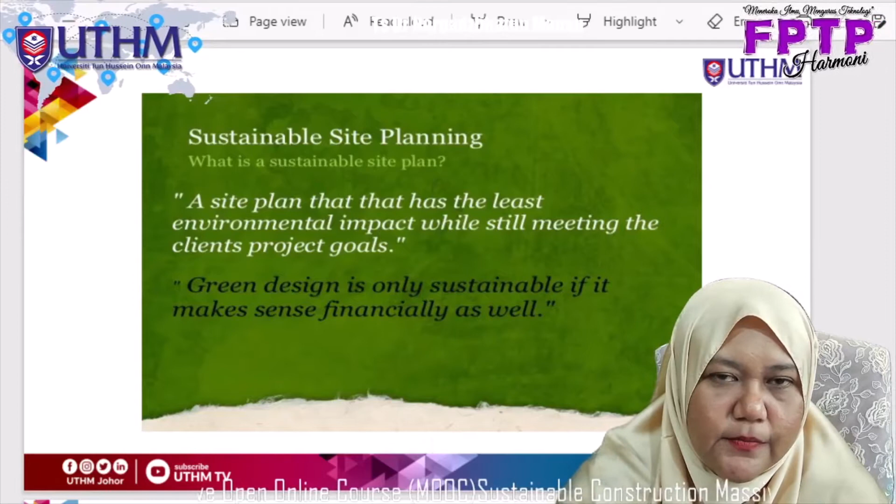What is the definition of site planning that is sustainable? A site plan that has the least environmental impact while still meeting the client's project goals. That is the definition of sustainable site planning.

So to become sustainable, you need to worry about three main things. In order to be sustainable, you need to consider these three aspects, which are social, economic, and environmental. When you achieve balance between these three main elements, you can and you will achieve sustainability.

So in regards to our topic today, which is site planning, why do we need to have a sustainable site planning? And what does it require to become sustainable during site planning?

The criteria for selecting a new site normally include engineering, environmental, and economic aspects. Usually, some of these criteria limit the choice of potential sites to a given field. These sites are then investigated further for their suitability through site visits and analysis of existing information.

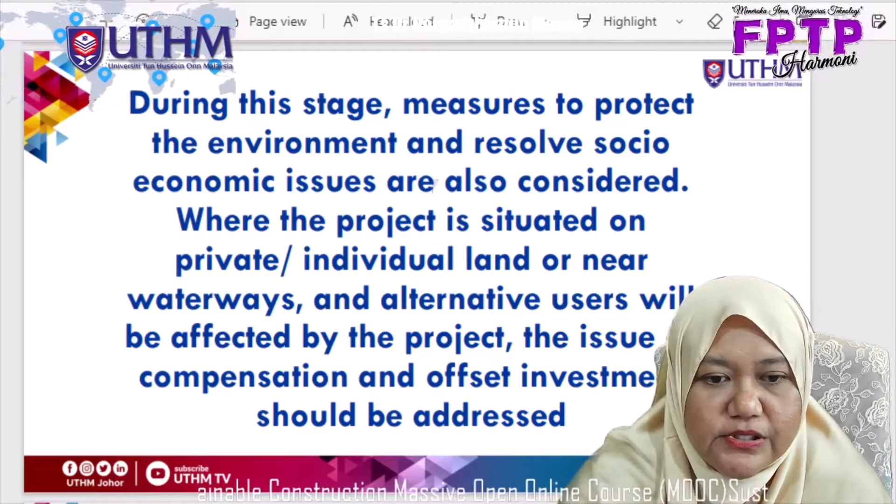During this stage, measures to protect the environment and resolve socio-economic issues are also considered. Whether the project is situated on private or individual land or near waterways, and whether alternative users will be affected by the project, the issue of compensation and offset investment should be addressed.

So there are 9 factors to select appropriate sites to become sustainable site planning. First is site selection and planning. Second is public transportation access.

Third is community services and connectivity. Fourth is open spaces, landscaping, and heat island effect. Fifth is construction system and site management.

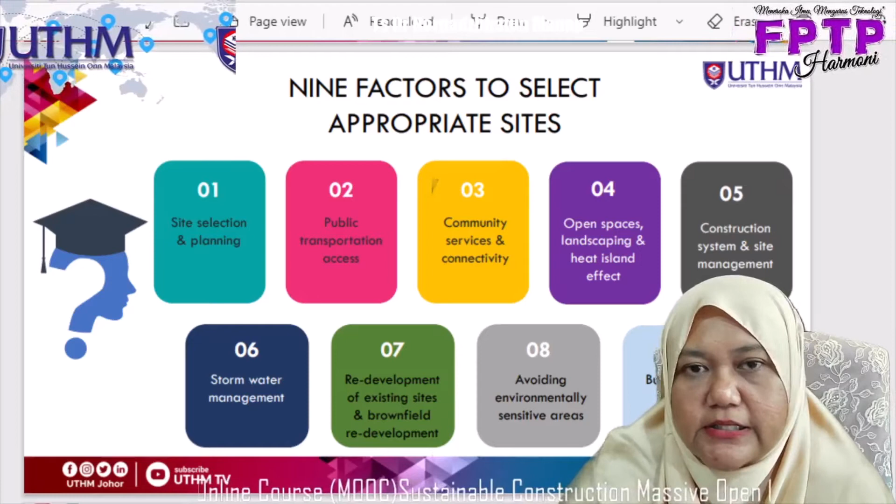Sixth is stormwater management. Seventh is redevelopment of existing sites and brownfield redevelopment. Eighth is avoiding environmentally sensitive areas, and last but not least, building user manual. So we go one by one.

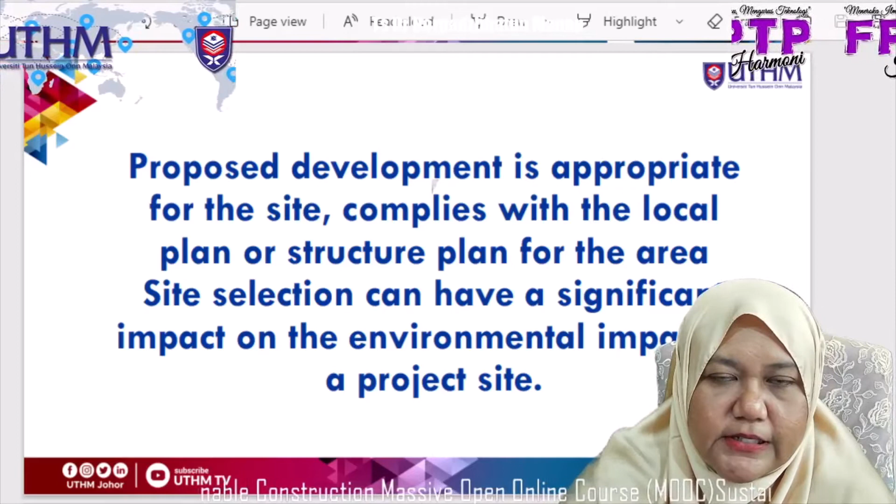First factor to select an appropriate site is site selection and planning. Proposed development should be appropriate for the site and comply with the local plan or structure plan for the area. Site selection can have a significant impact on the environmental impact of a project, which is why it is one of the key elements when considering a site for your construction project.

There are some specific parameters to consider when selecting a site, including avoiding floodplains. Continued development in natural floodplain areas has contributed to increased flooding and increased soil loss. Also provide buffers for bodies of water. Development around bodies of water such as streams and wetlands should be limited, and should include buffers of undisturbed areas of 50 to 100 feet or more.

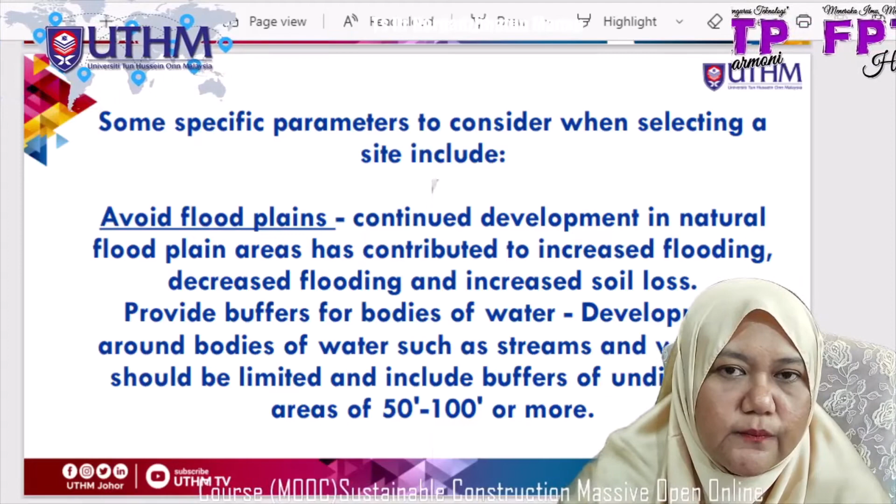Also avoid greenfields. Greyfields and brownfields are often less expensive to develop, place less stress on infrastructure, and limit the environmental impact of developing previously undeveloped sites. But do avoid greenfields.

The third one is transportation. The impact of transportation of people and goods to a site can be significant. Try to select sites that encourage the use of public and non-motorized transportation.

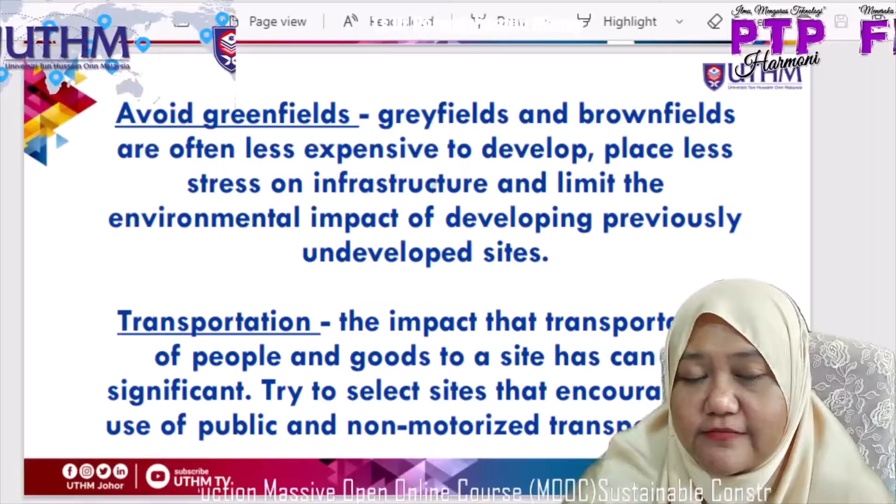This relates to the second factor to select an appropriate site, which is public transportation access. This is a picture that will encourage a site close to a transport hub. If you are selecting a site, you need to have access to public transportation. You need to make sure that your project site has public transportation access.

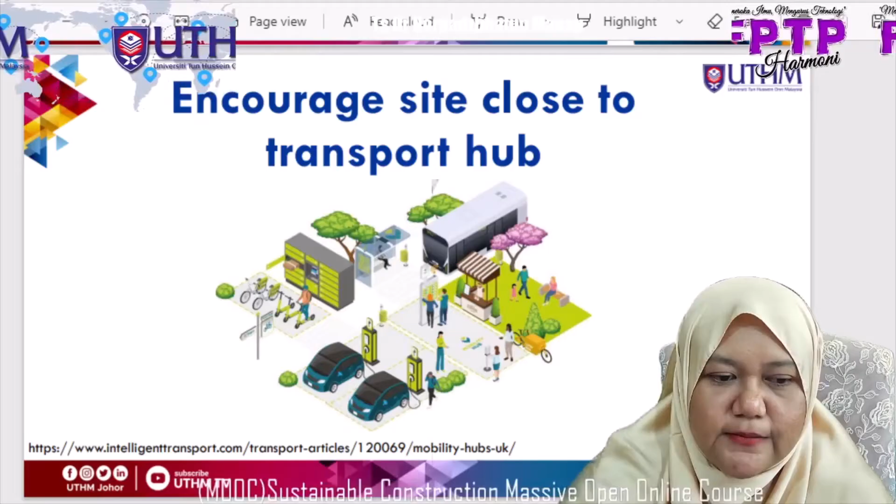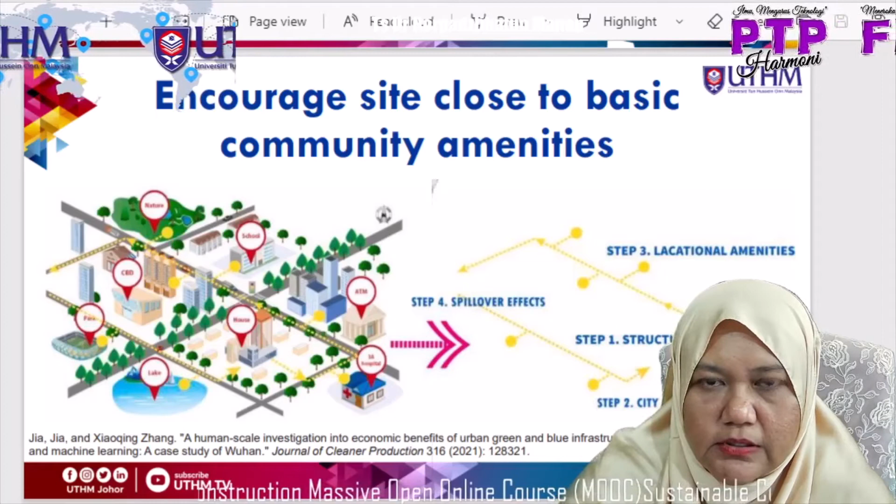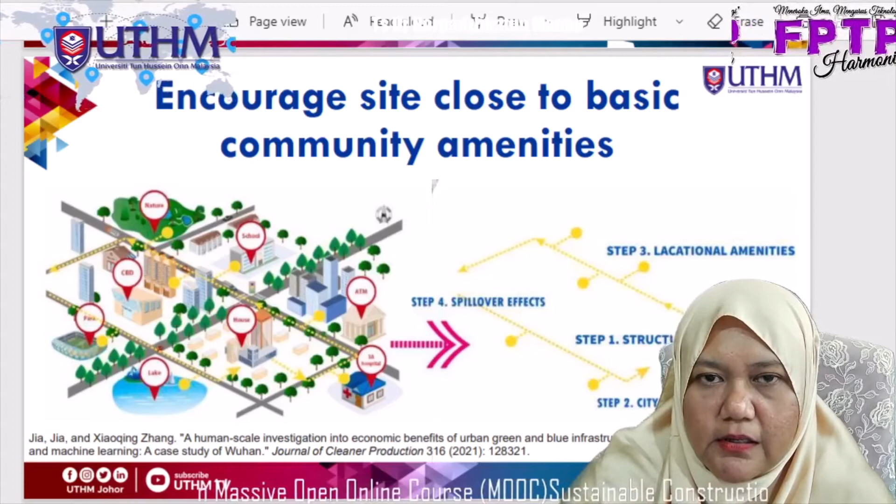The third factor to select an appropriate site is community services and connectivity. This will encourage a site close to basic community amenities, for example schools, ATMs, hospitals, lakes, and parks. This not only increases the quality of life of your potential users, but also becomes a site that is environmentally friendly.

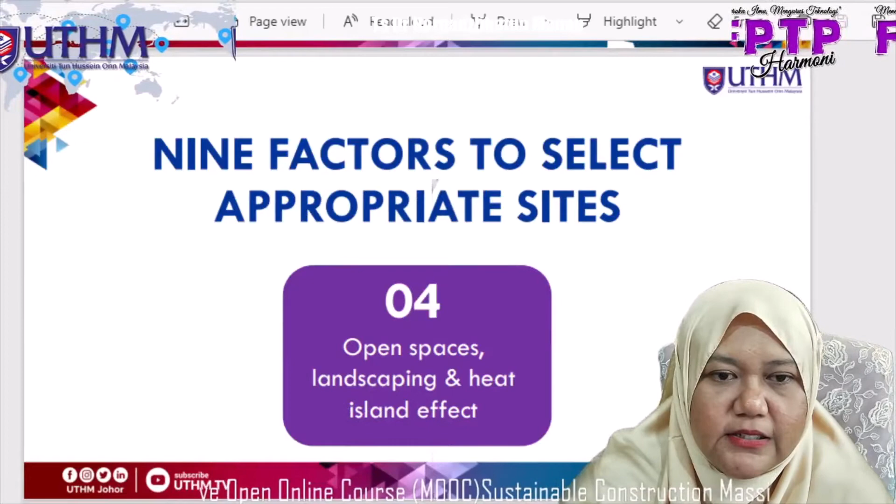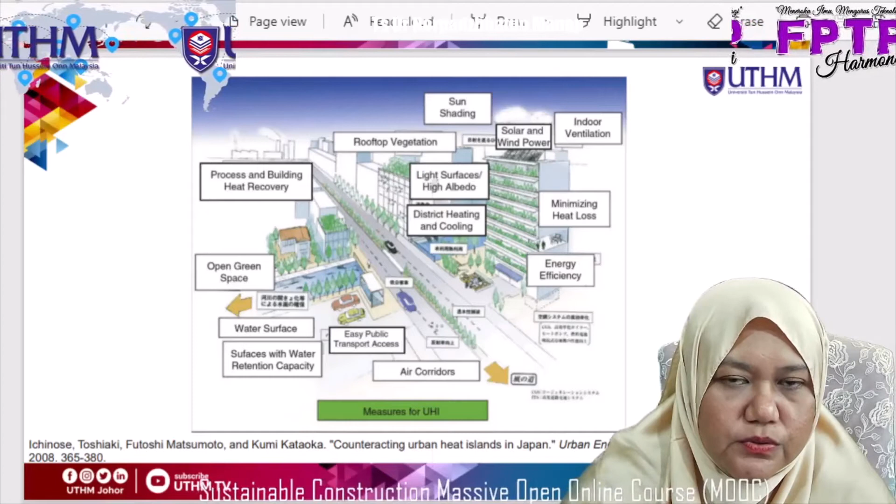The next factor to select appropriate site is open spaces, landscaping and heat island effect. Development should have small carbon footprints and more landscape. This is a picture which you can use as an example on how to make sure that your project site is green and sustainable, which also considers the urban heat island effect.

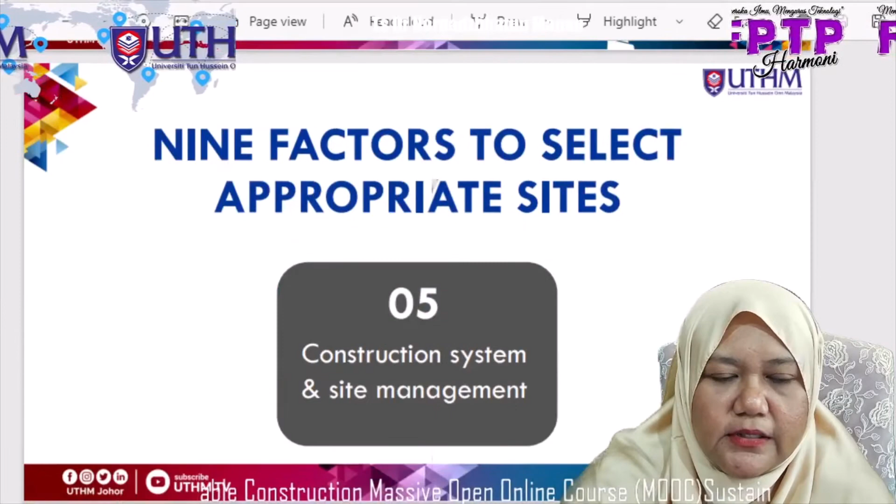The next factor to select appropriate site is construction system and site management. As an owner or a contractor, you should encourage IBS and reduce on-site construction.

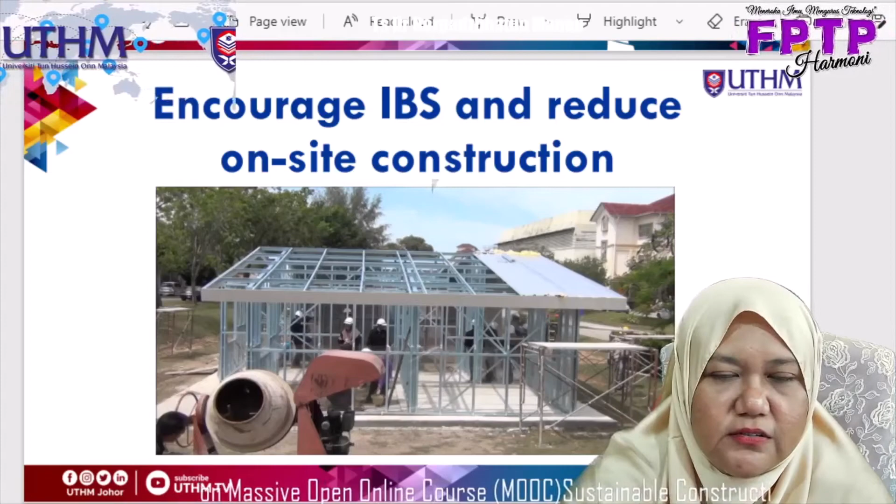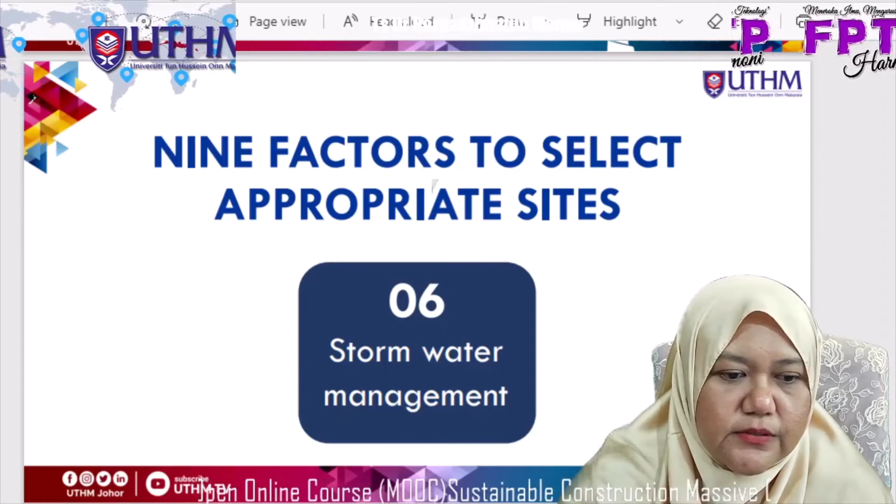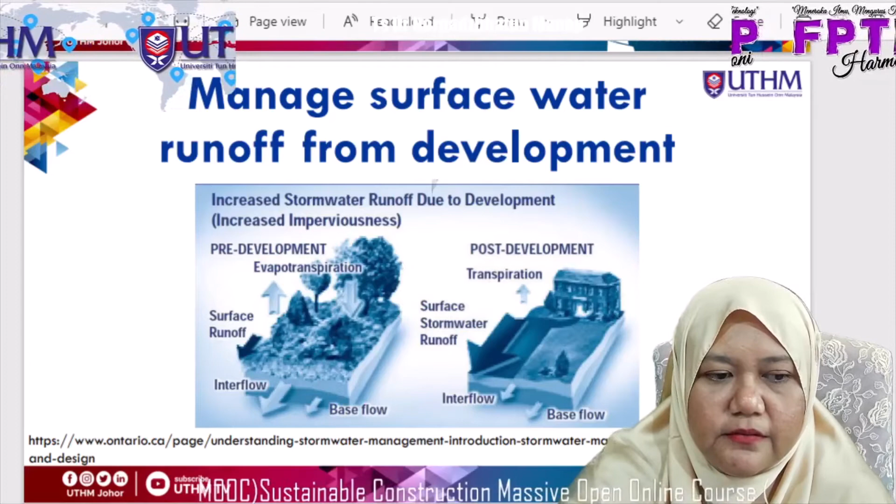The sixth factor to select appropriate site is stormwater management. You need to reduce your stormwater runoff. As you can see, these are the two pictures that can show the effect when you cut down the trees. There is a paper that you can read more. I have given you the link. Please explore.

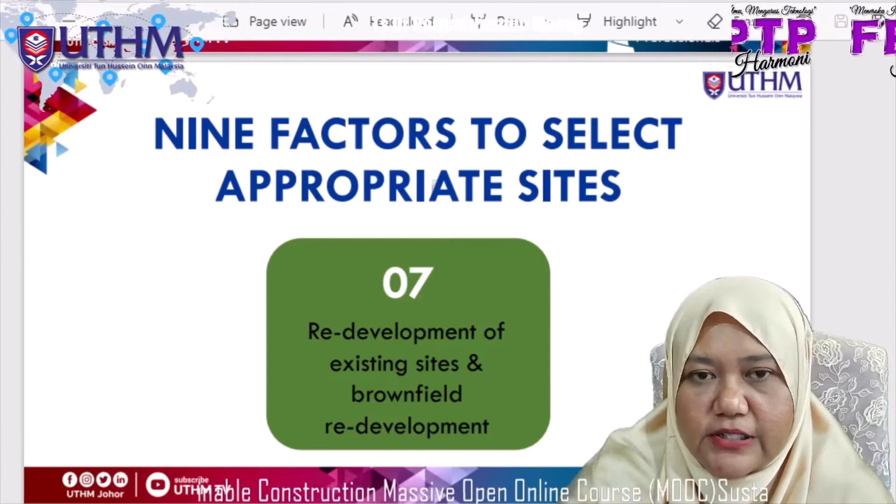The seventh factor to select appropriate site is the redevelopment of existing sites and brownfield redevelopment. You should redevelop and rehabilitate existing environmentally contaminated or used sites if you can. There are many measures or approaches to use this, which can do lots of things and which can benefit you in many areas.

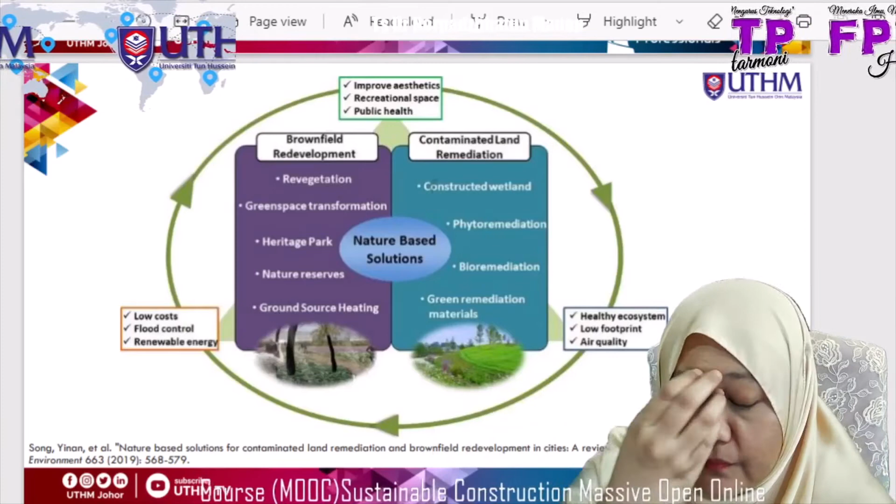For example, it can improve aesthetics, recreational space, public health. It can also become a healthy ecosystem, low footprint, and improve air quality. There are a couple of nature-based solutions in order to redevelop brownfield or contaminated land remediation. So you can use revegetation, green space transformation, heritage parks, nature reserves, and ground source heating if you want to redevelop the brownfield.

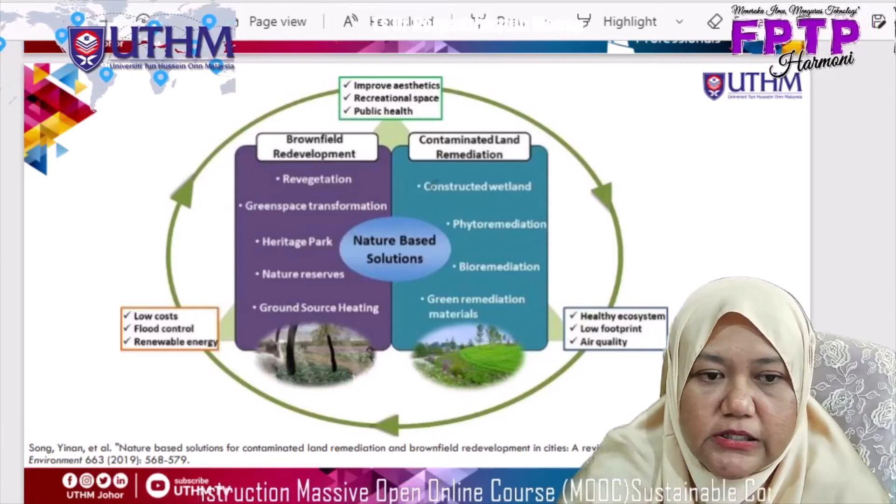If you are dealing with contaminated land and you want to remediate it, you can make a constructed wetland, or you can use the approach of phytoremediation or bioremediation, or just use green remediation materials. I've also provided a current paper that talks about the redevelopment of brownfield and contaminated land for you to read at your own leisure time.

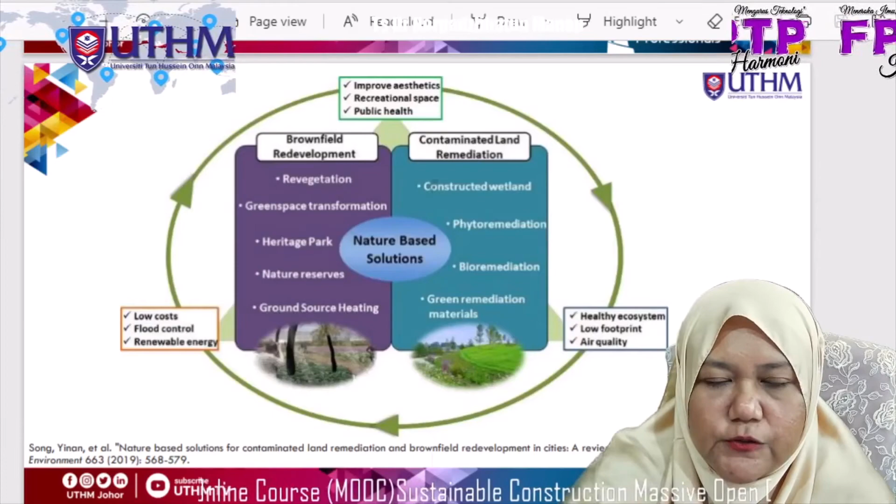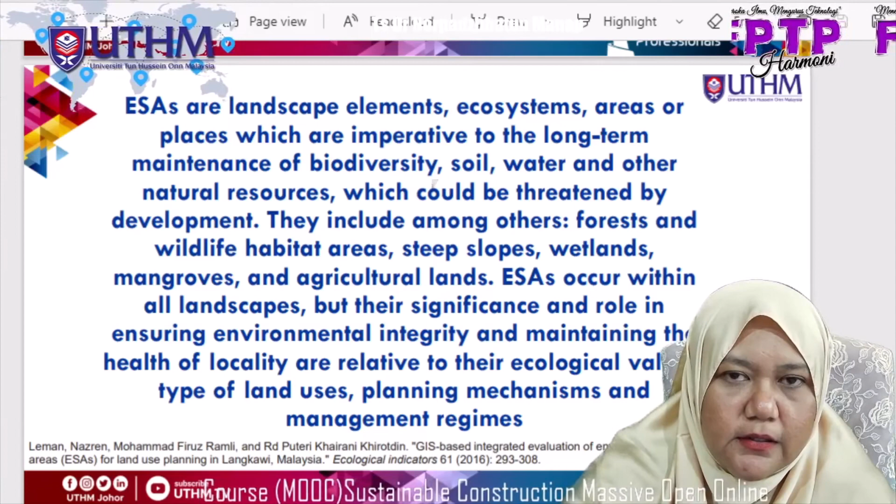ESAs occur within all landscapes, but their significance and role in ensuring environmental integrity and maintaining the health of the locality are relative to their ecological values, type of land uses, planning mechanisms, and management regimes. Please do have some background reading in this paper that I mentioned.

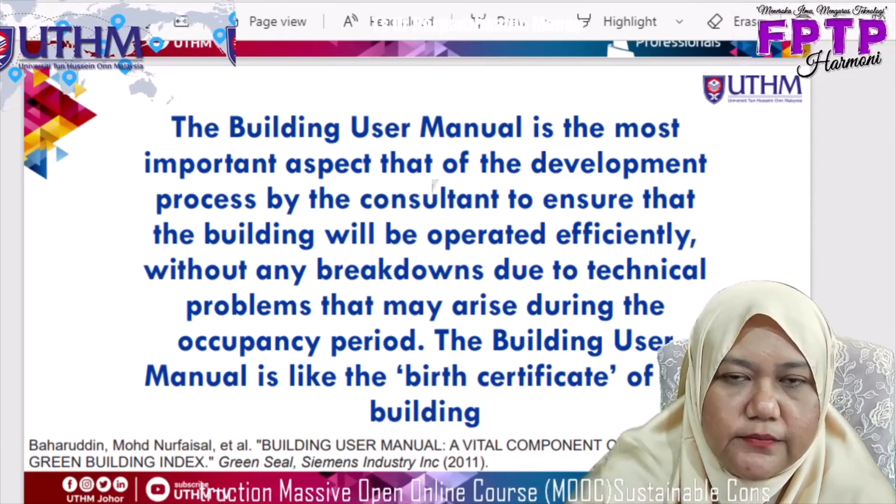So the last factor to select appropriate site is the building user manual. The building user manual is the most important aspect of the development process by the consultant to ensure that the building will be operated efficiently without any breakdowns due to technical problems that may arise during the occupancy period. The building user manual is like the birth certificate of the building. You should have documents or proper guidelines for user information to sustain performance during occupancy.